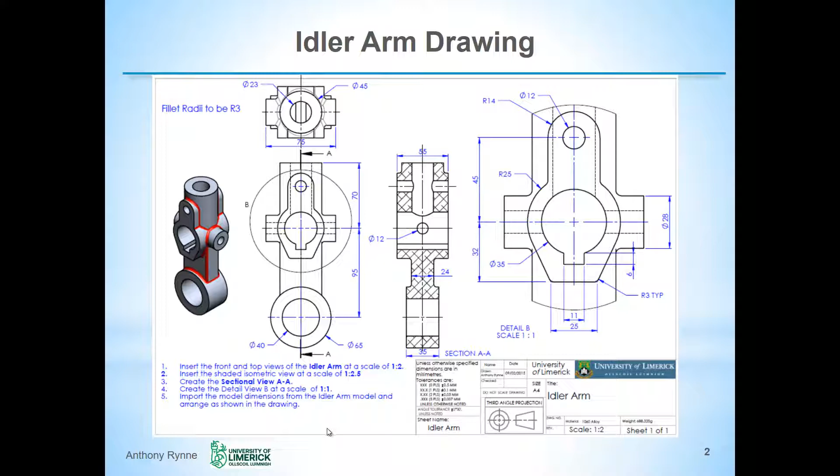Looking at the design intent for the model, the part is symmetrical about the central axis, as we've already seen, and therefore it makes sense to put the model origin on this axis so we can make maximum use of symmetry in our sketches and also in our end conditions when we extrude our features.

All the fillets and rounds in the model are radius 3 millimeters. We'll use aluminium alloy as the material, so 1060 aluminium alloy, and at the end the weight of our model should be around 488 grams.

A modeling tip that I would recommend is that when we are adding features, it makes sense to create the boss features before the cut features, as this avoids problems later on of cut features removing material that you have to add in.

A modeling tip that I would recommend is that you create the cut features after the boss features, or putting it the way I have there on the screen, create the boss features first. By doing things in this order, it avoids problems later on in your model when, if you have cut features already created and then start adding in boss features, you may run into problems with the boss features violating the features that you've created.

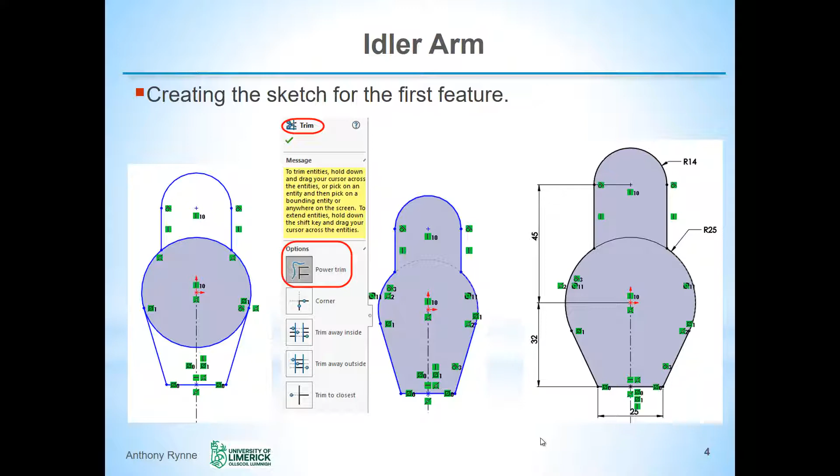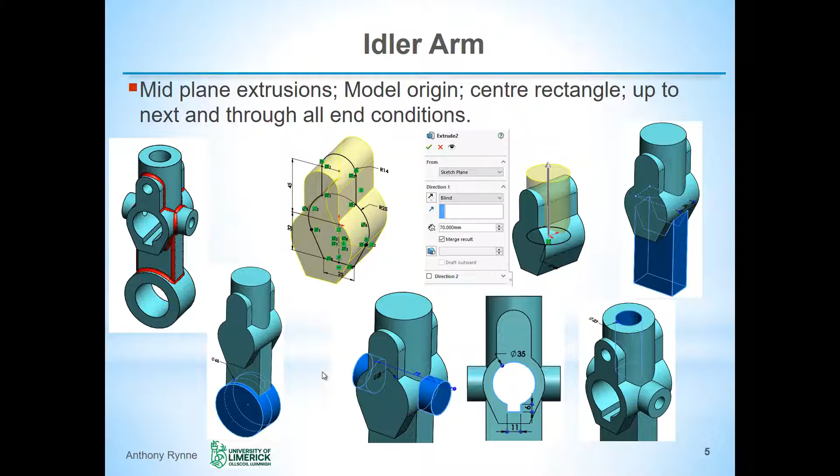Looking at the sequence of creating the different features, you can see here, to make use of our symmetry on the front plane, I've used a mid-plane extrusion here, and as we go on we'll use mid-plane extrusions in the other direction as well. So we'll create our boss features first, and then we'll go on and create our cut features, and usually at the end we would leave our cosmetic fillets, which can be added in at the end in a logical sequence.

So we'll go and model this part now in SolidWorks.

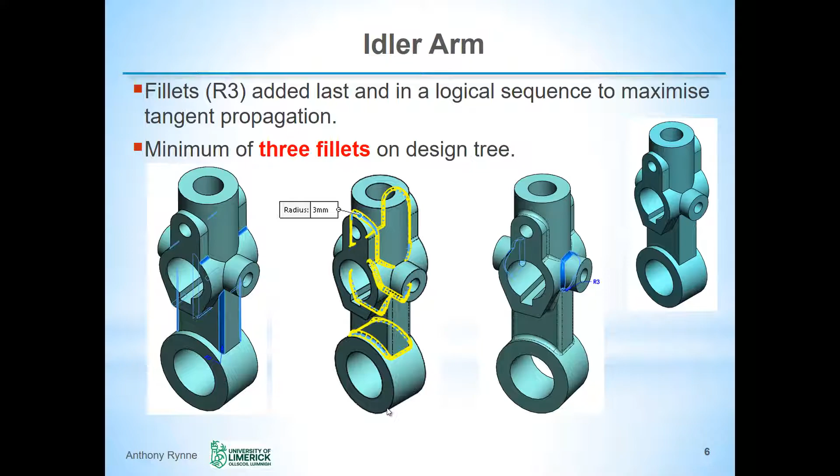I'll begin by opening a new part document. So I'll select one of my part templates. I have a plain carbon steel template here.

My material currently is plain carbon steel, but I am modeling this using aluminium. So I'm going to right click on plain carbon steel and select 1060 alloy. It's important to have the correct material in order to get the correct weight at the end.

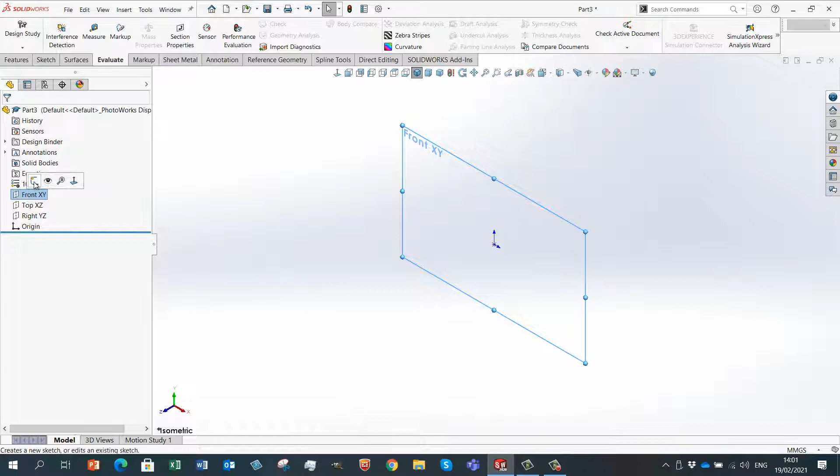I'll begin by opening a sketch on our front plane. So select the plane and click the sketch tool, and we can do everything from there.

Now I'm using mouse gestures, so by dragging my right mouse button, I'll start by drawing a circle from the origin. The finished circle will have a radius of 25, or a diameter of 50.

So I want to draw the top portion now, so I'm going to change to line. Right mouse button and drag my cursor to the left, we'll pick up the line tool, and clicking anywhere here in the circle...

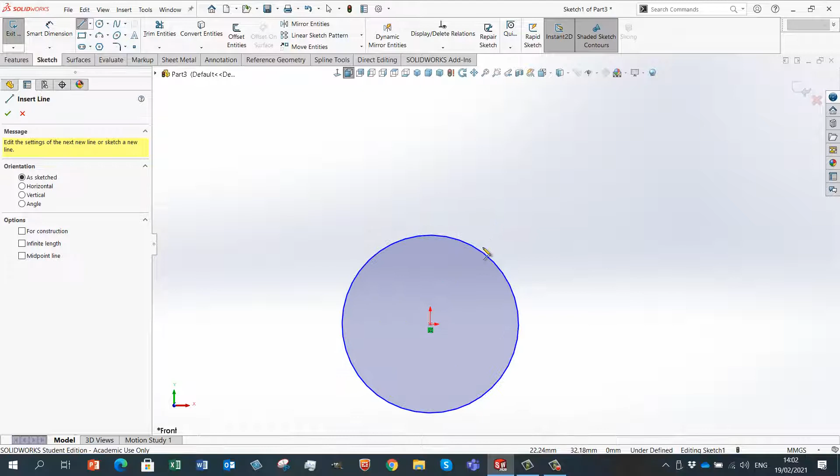I will draw a vertical line. Now if I drag away from the next endpoint and then go back over it again, SolidWorks will change to a tangent arc. So I'm going to draw my semicircle and bring the line down there to meet the circle.

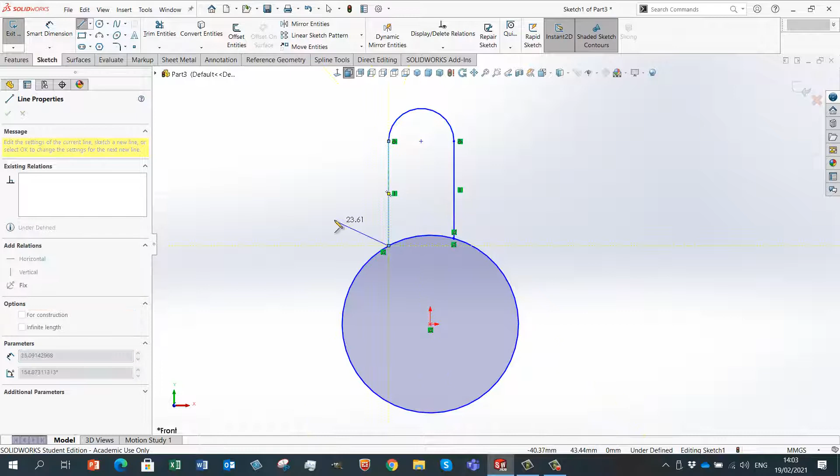If you press escape or double click the left mouse button, that will end your line command. Now you can see here that we've got a line there at the start that we shouldn't have, so I'm going to delete that out. That happened there at the start when we were drawing our line away, and we ended up drawing a little line. So if that happens, you just zoom in and delete it out.

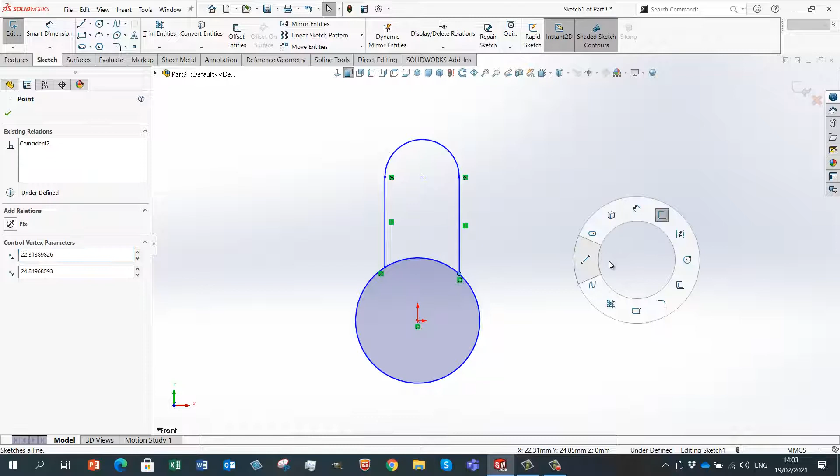So this is clearly not symmetrical. To make this symmetrical, I'm going to draw a construction line. Just draw a regular line from our origin, drag it straight up there, make sure it's vertical. And if I right click on it, I can convert it into a construction line.

So if I draw a crossing window, picking up the two vertical lines and the center line, I now have the option to add symmetry. So make symmetric - this is important. So now we have symmetry here in this sketch.

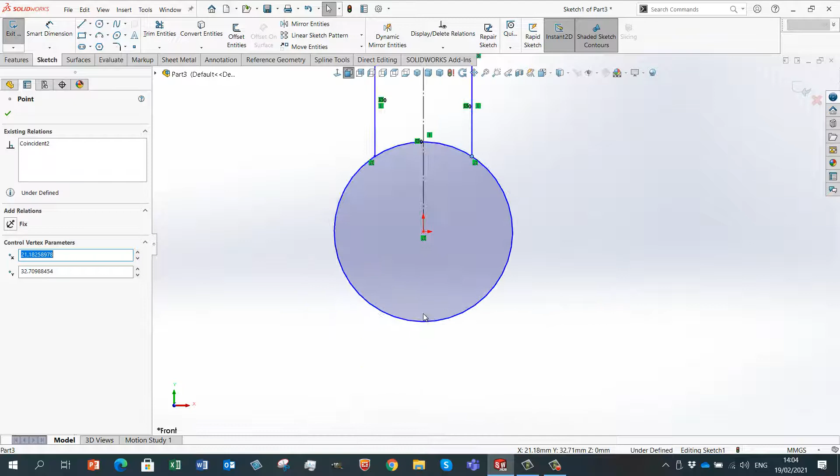Now I'm going to draw a line tangent to the circle. If you click anywhere on a circle and drag away from it like that, you can see the line is automatically tangent there.

So I'll draw a line down there, click, draw a horizontal line, again making sure it's horizontal, look at the feedback, and I want to draw a line back to the circle that's also tangent. Again looking at the feedback there, you can see the line is tangent. Double click your left mouse button or press escape to complete that line.

By clicking on the relations here, you can see I've got a tangent relation between the line on the left and the circle, and I've got the same over here. This also needs to be symmetrical.

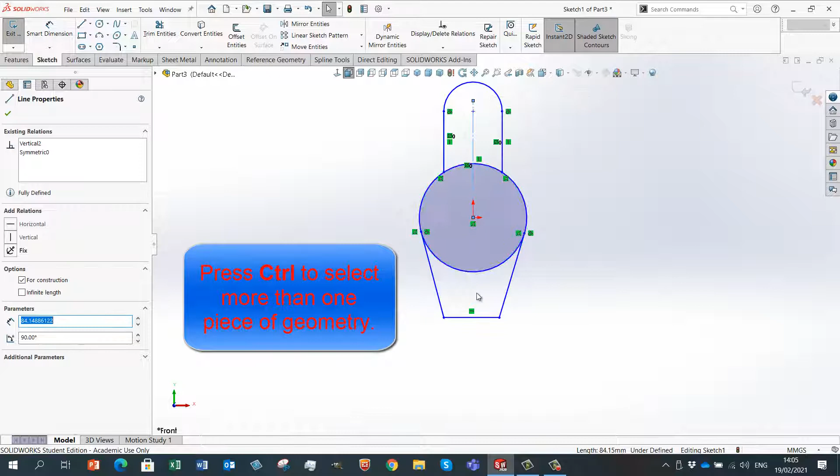I can use the same line up here, and if I use that now, I won't be able to use a crossing window, but if I click that line and press Control while clicking these two slope lines, I can also add symmetry there with respect to the same center line. Checking that, you can see now our sketch is more intelligent.

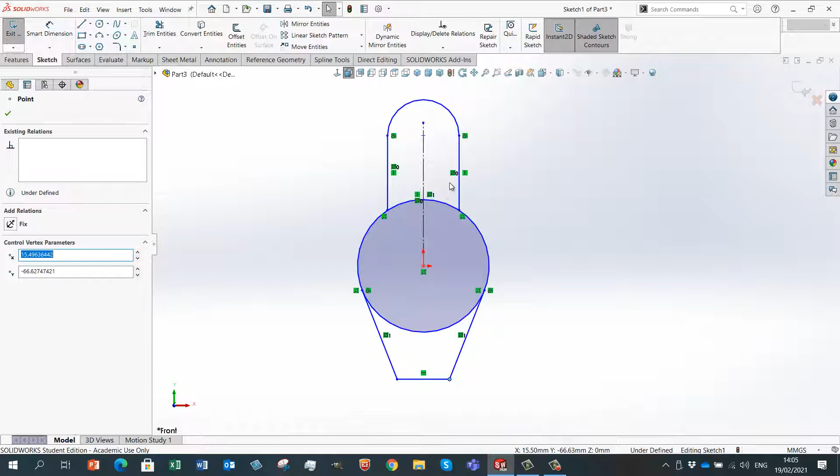Because I've got shaded sketch contours turned on, we can see here that the circle is shaded in, but this area here is not, and neither is the area at the bottom. So I want to create a closed profile here that's all shaded in.

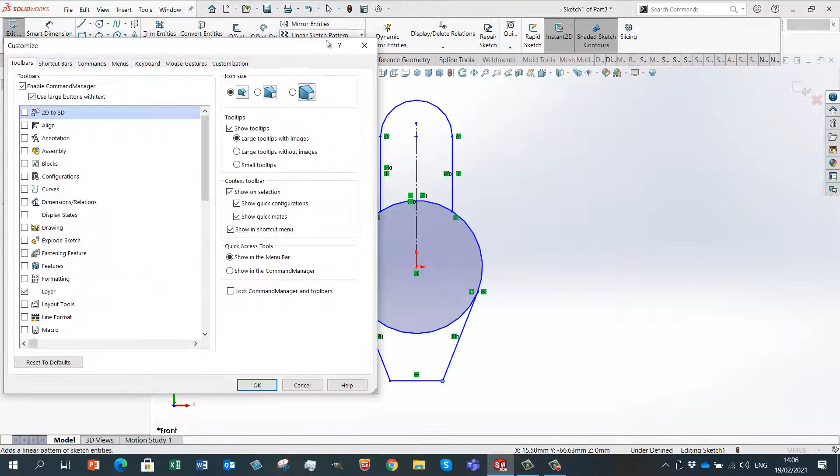So I'm going to trim away the parts of the circle that I don't want, using my right mouse button and dragging - you can see I've got 12 mouse gestures on my wheel. If you don't have 12 mouse gestures, you can turn those on by going to options, customize, mouse gestures, and making sure they're set to 12.

So dragging to the southwest, there's the trim tool. I'm just going to use power trim. I do have an option here to keep trimmed entities, but I'm not going to use that on this occasion.

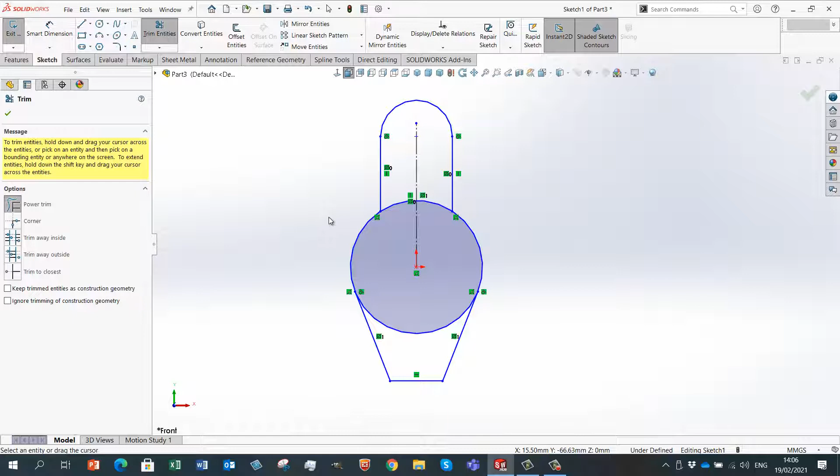We don't need any construction geometry for our trim circle. So just left clicking and dragging over the circle will get rid of that portion, and I'll do the same down here - all I'm doing is left dragging over the part of the circle that we want to remove. So there's my sketch now.

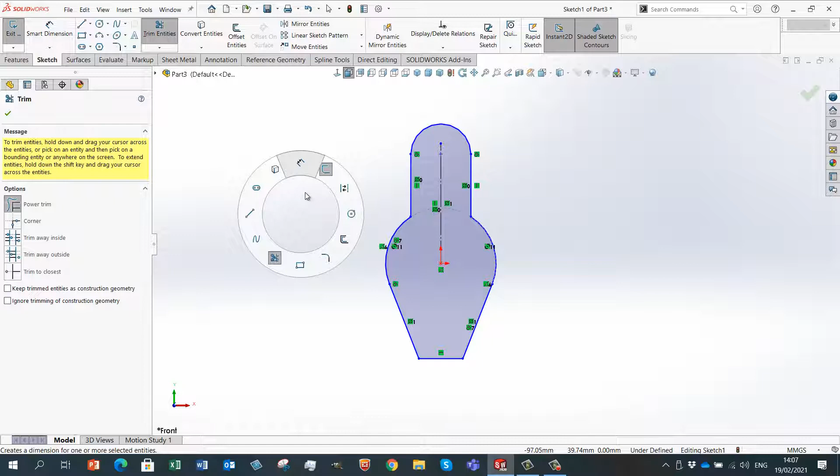I'm now ready to add the dimensions. So right mouse button, drag straight up to the top, and I can start adding my dimensions. Now when you add the first dimension, SolidWorks will scale everything proportionally.

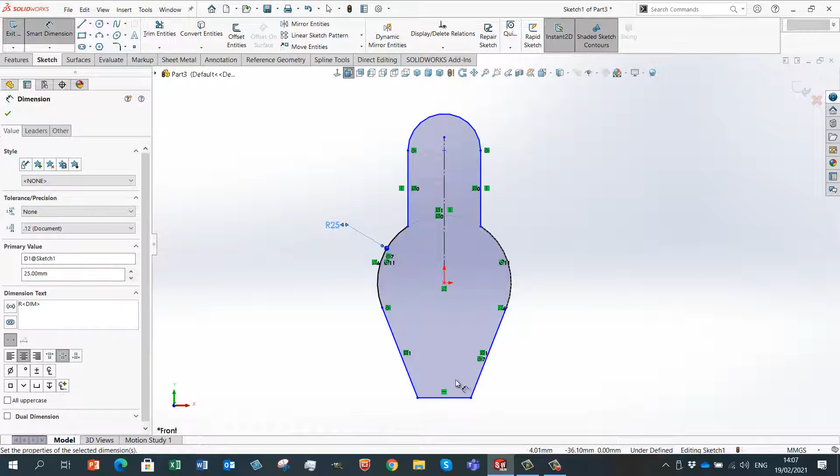So the radius on this is currently 38.9 and our final radius is 25. If I type in 25, everything has now been scaled proportionally and our sketch doesn't distort. This here is 25.

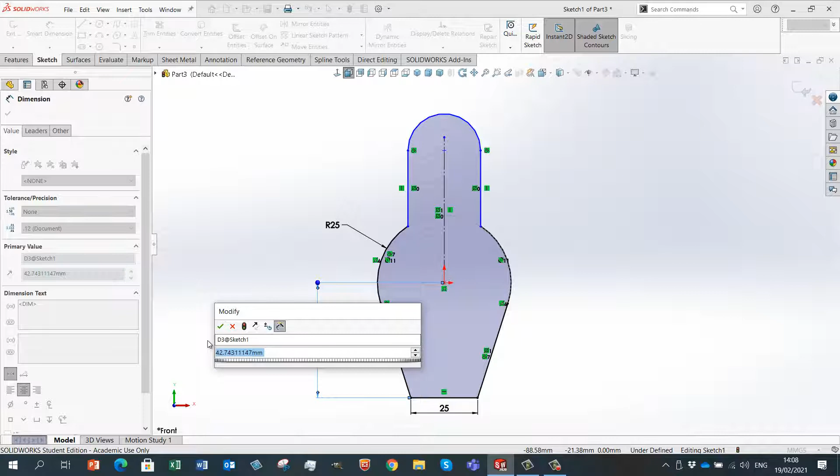The distance from the bottom edge to the center of the circle, or the origin, which is the same thing - but I'm going to select the circumference of the circle when adding my dimension, and that's 32. That gives you more options.

SolidWorks will find the center of the circle by clicking on its circumference, and similarly clicking on the circumference of this arc here, I will get the vertical distance between those centers, and that's 45.

So as I begin to add my dimensions, you can see the sketch is turning black, which means it's becoming fully defined. So clicking on this radius here, that's 14, and now my sketch is fully defined.

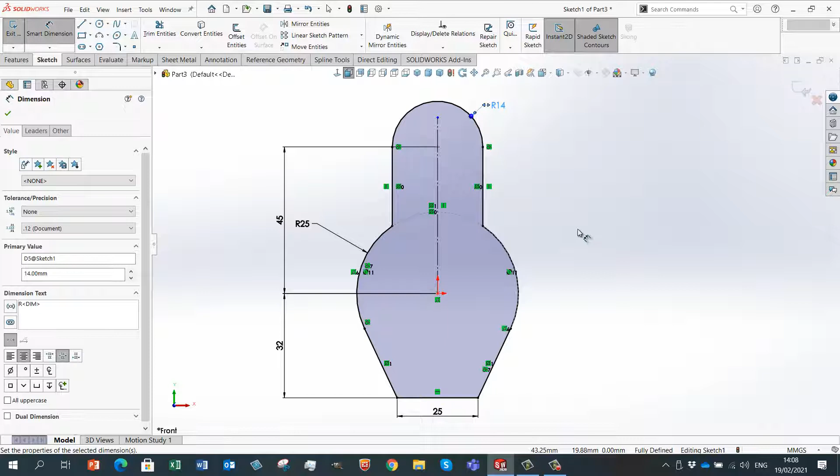So that's one way to create this profile here. That's our sketch completed. You do have the option of rounding these corners here if you wanted to with the sketch fillet, which you will find on the sketch toolbar, or if you drag your right mouse button you'll also find it on the southeast.

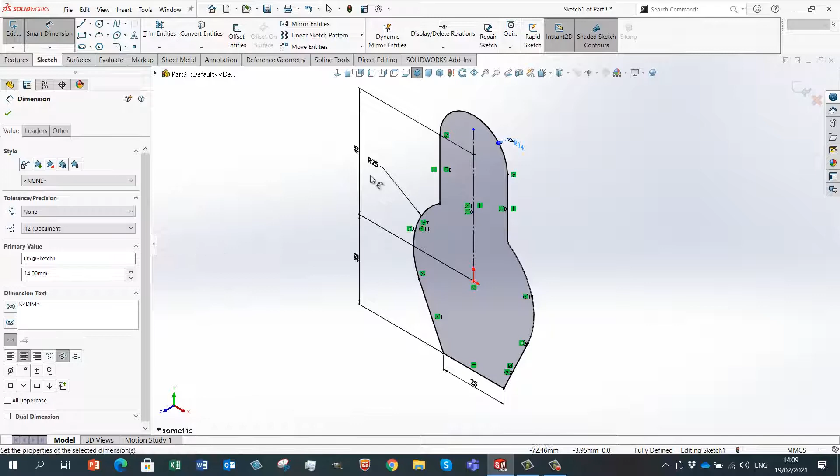So that's my sketch, I'm happy with that. What I'm going to do is put those fillets in later on as an applied feature, but you could put them in this sketch using the sketch fillet tool. Let's right click here and extrude our boss base.

So I'm going to make use of symmetry here when we create our feature by using the mid-plane condition. Mid-plane, as you can see now, places the sketch at the center of our extrusion, and we just put in the total distance from front to back. In this case the extrusion depth is 55.

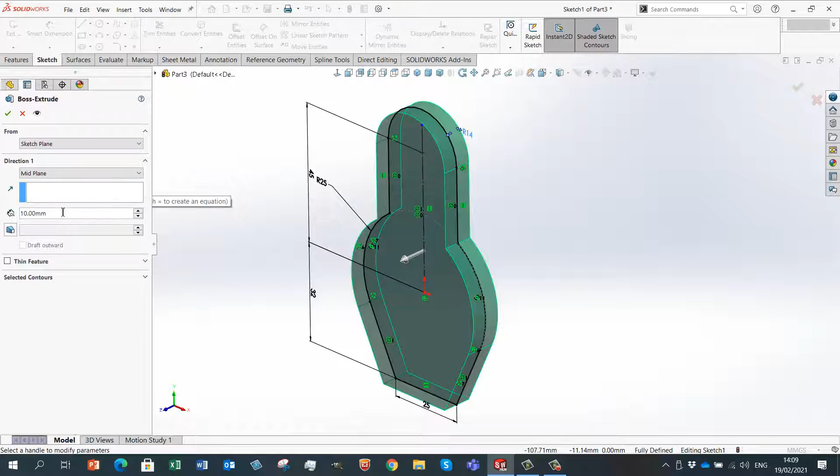So there is our first feature. The extrusion depth is 55, so SolidWorks will calculate that the sketch needs to be in the center and will work out an equal distance on both sides. Click OK, and there's our first feature created.

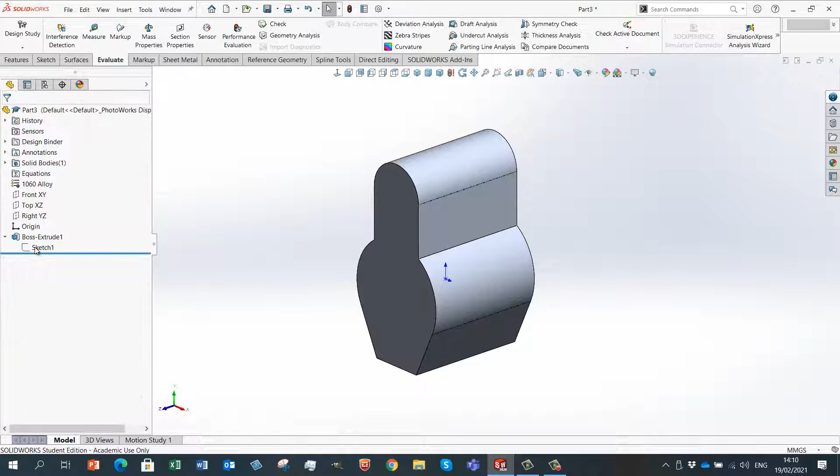You do have the option, if you wanted to, of right clicking on a sketch and giving it a color just to make it stand out in your model. And if I right click on the sketch and click the show tool, the sketch is then visible. I'll turn that off. We're going to concentrate on creating the boss features, because if I were to create some cuts at this stage, these would make it more difficult to add boss features through the model.

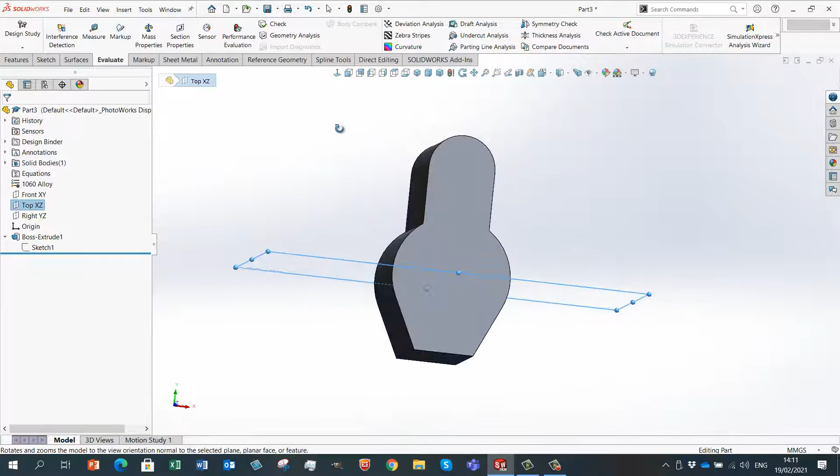The next feature I'll create is the one at the top, so I'm going to open a sketch on the top plane. The top plane coincides there with the origin of our sketch for our circle. So there's the model origin right at the heart of the model. Clicking on the top plane, let's open a new sketch.

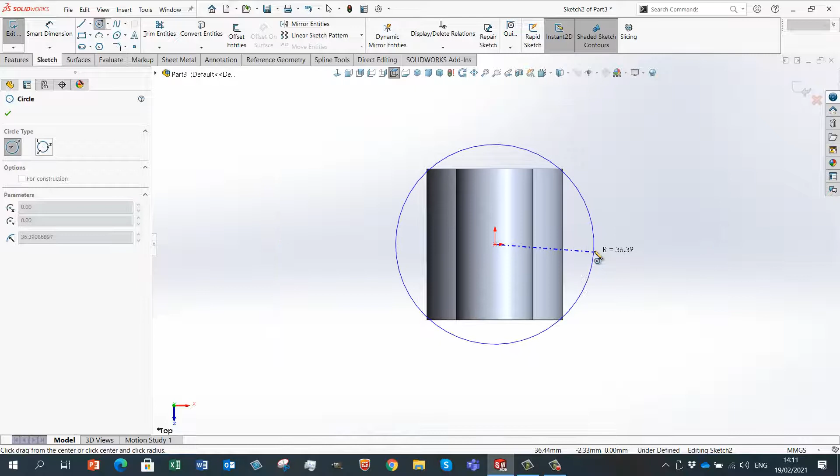So I'm now looking straight down on the model, and let's draw a circle. The origin is exactly where I need it to be. Drawing our circle there, and looking at the drawing, the diameter of that is 45. So let's dimension that.

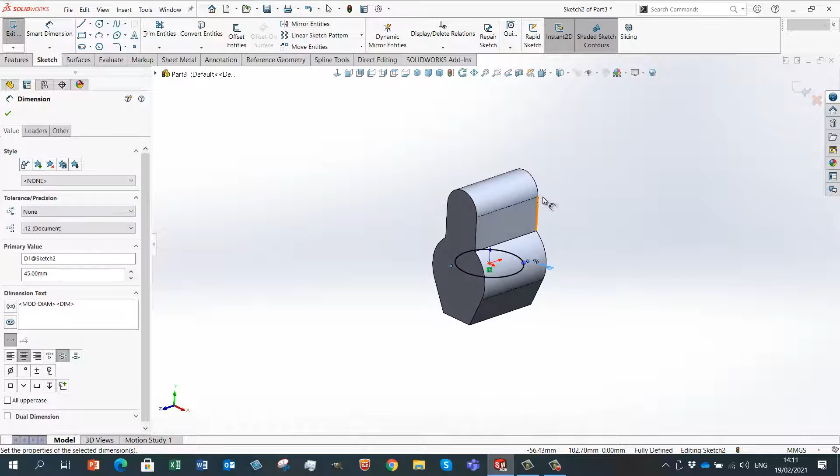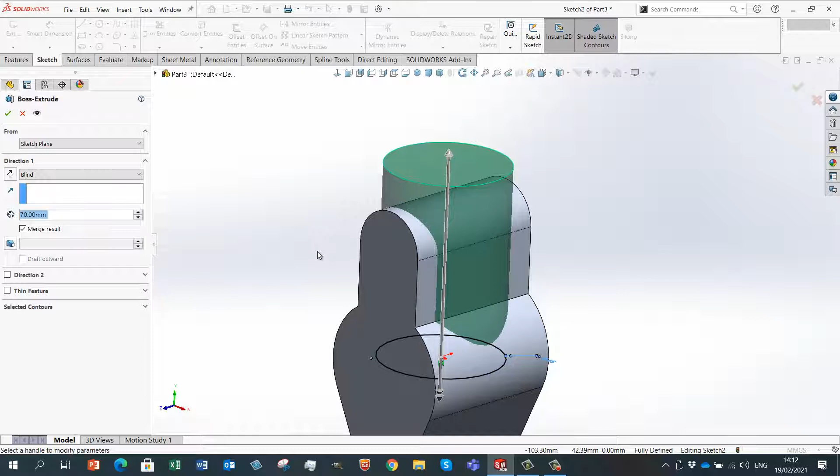Let's change to our isometric view, and you can see that circle is drawn there on the top plane, and we're just going to extrude this up as a boss feature for a distance of 70 millimeters. We can use this handle here and snap it to the ruler like so - 70 millimeters, that is the extrusion distance vertically from the top plane. Let's click OK on that.

There are lots of ways and sequences that you can take to modeling most parts. So I've created that one first, but equally I could have created the rectangle sketch on the bottom first. By doing it this way I can relate the size of my rectangle to the diameter of this circle because they are actually the same size.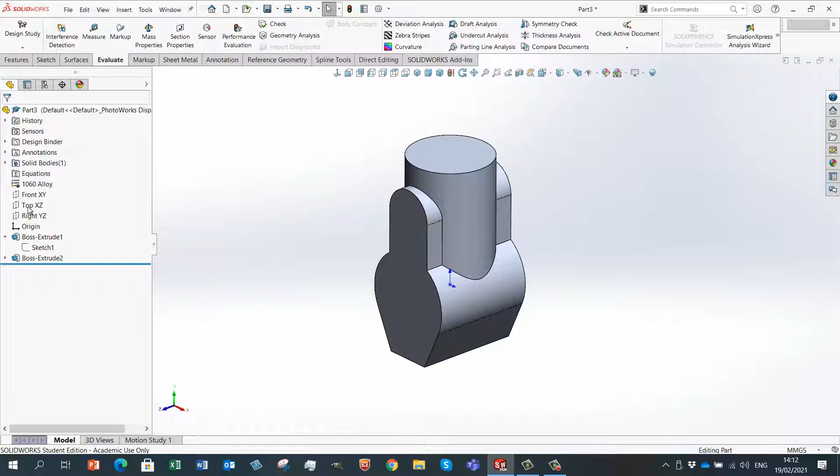So again, click on the top plane and let's open a sketch. This time I want to draw a rectangle, so dragging straight down, there's the rectangle tool, and when you draw a rectangle, I'm going to draw a center rectangle. I think that would be the best option here, and we can put in construction lines from corners if we want. So using that option, I'm going to click here again on the origin and drag out my rectangle.

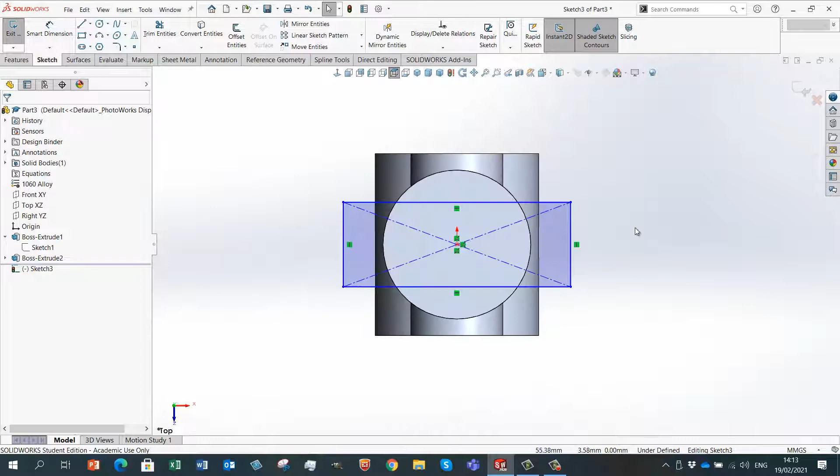So that rectangle is on the top plane, and looking normal to it, I'm now going to dimension this. Rather than making this side 45 millimeters, it's better for our design intent if I capture this relation with a tangent relation. So I'm going to control select the edge of our circle and our line, and add a tangent relation there with the pop-up that appears. You can see now that defines those lines in that direction.

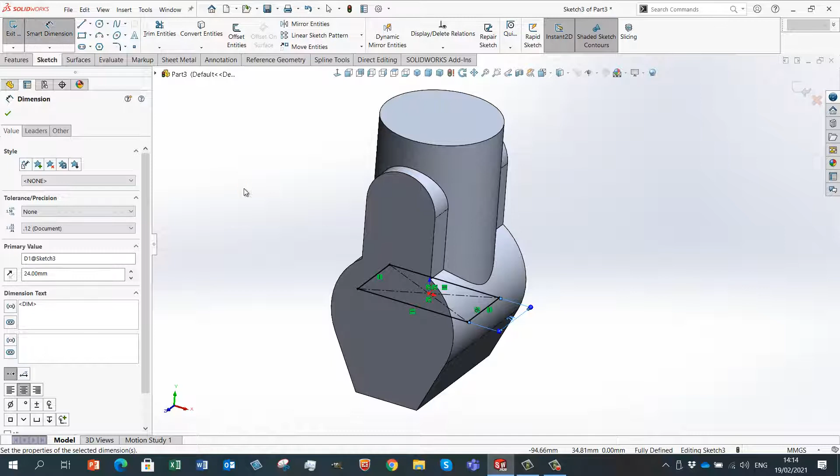The depth I will add with a dimension. So in this direction, the distance across there is 24. And I'm going to extrude this down 95 millimeters as per the drawing. So again, right clicking and extrude boss base. I'm going to reverse the direction and put in the depth of 95. So now that's our third feature.

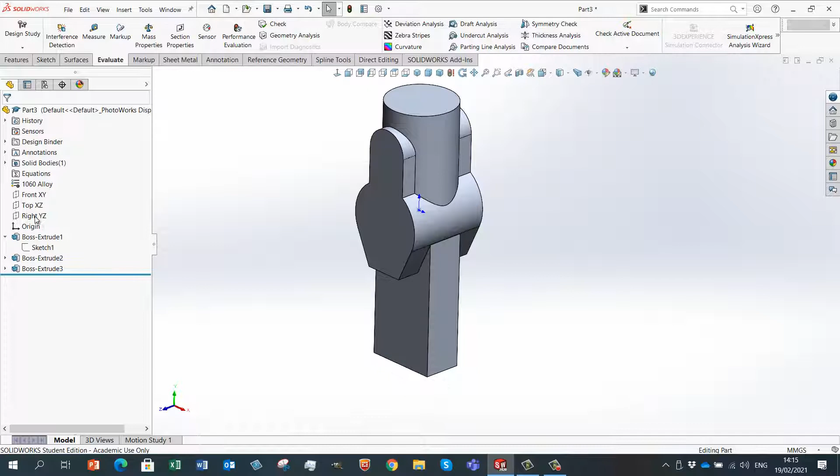The next boss feature I'll create is the cylindrical feature at the bottom. So I'm going to go back to my front plane and open a sketch, drawing a circle from the midpoint of the bottom edge, and the software again picks up the midpoint there for me. So just draw a circle. Let's dimension that. The diameter is 65. So there's our feature.

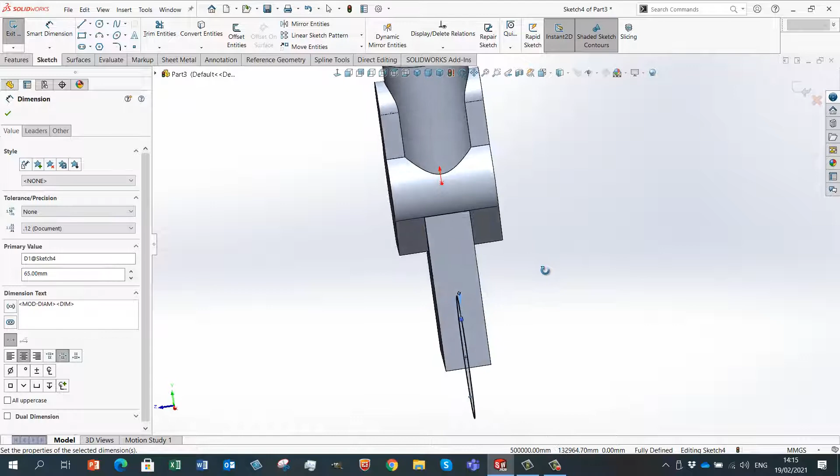Again, it's on the symmetry plane, which is the front plane in this direction, and extrude this out. Again, I'm going to use mid plane for my end condition. So changing to mid plane and giving the total distance, which is 35, that will create that feature.

So the first four features are all boss features. Now I'm ready to start removing material. I can do this in a lot of different ways. I'll start by creating a cut through here on the cylindrical feature at the bottom.

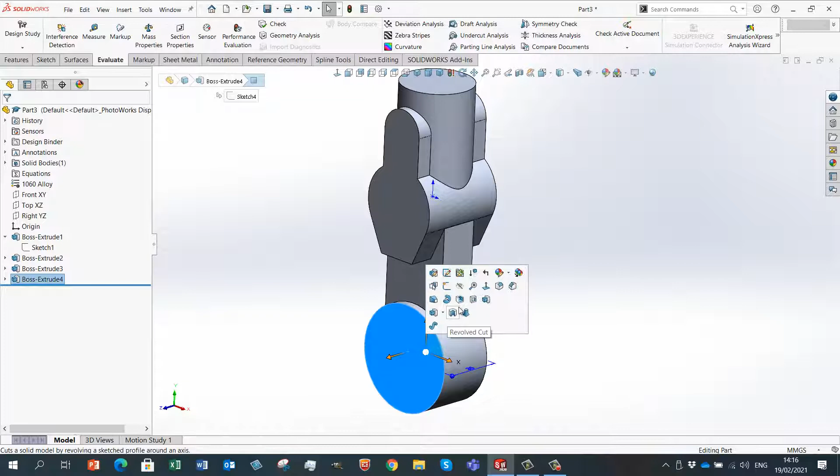So this time I'm going to open a sketch directly on that face, wake up the geometry here before I draw my circle. By clicking on it, I wake up the center, which makes it concentric. Now let's dimension this - that is a diameter of 40 millimeters.

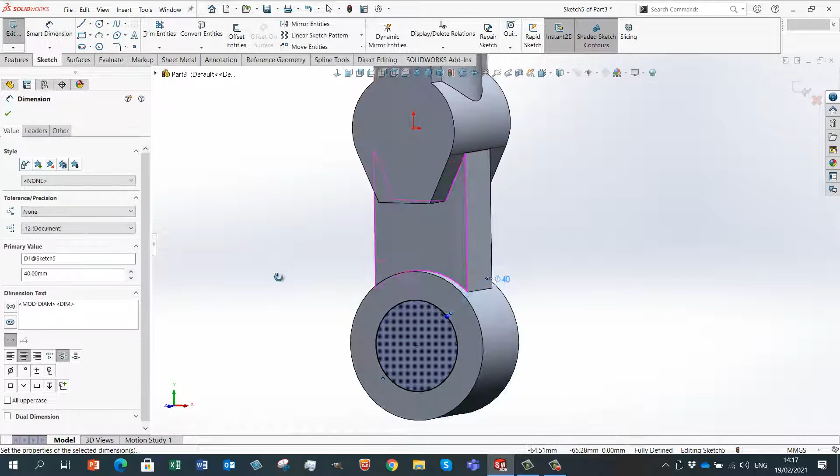Right click and again using my shortcut menu, extrude cut, and through all is the correct end condition here. So change that to through all, through all in that direction, of course, and click OK.

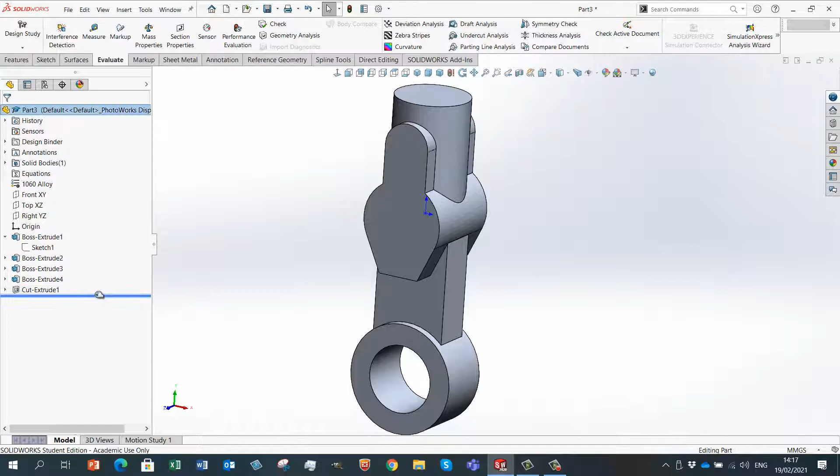The next feature I'm going to create is the cut. Actually, I missed a boss feature - there's another boss feature running in this direction that I forgot to add. It doesn't matter that the cut was created beforehand since it won't interfere with this boss feature, but I'll use roll back to demonstrate. So I've rolled back my design tree before the cut feature, and I'm going to put in the other boss feature first.

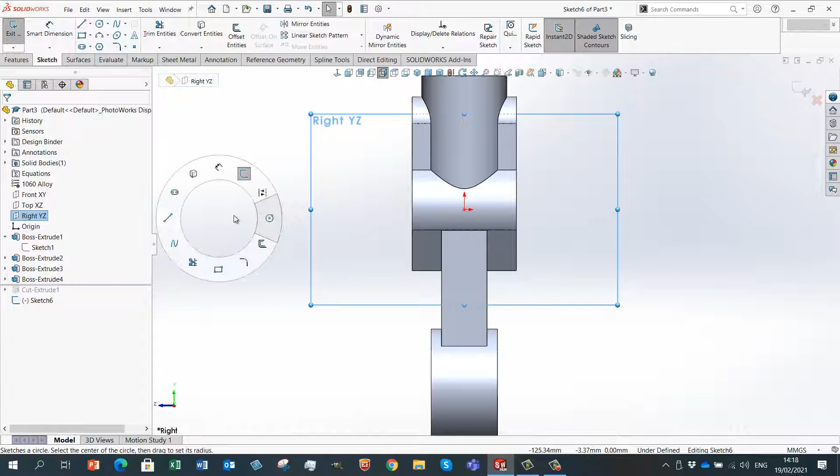So this time on the right plane, let's open a sketch, and again you see the advantage of creating the first sketch with the origin in the correct place - it makes it so much easier to add subsequent features. So the origin for my sketch is in the correct location. Let's draw my circle and dimension it.

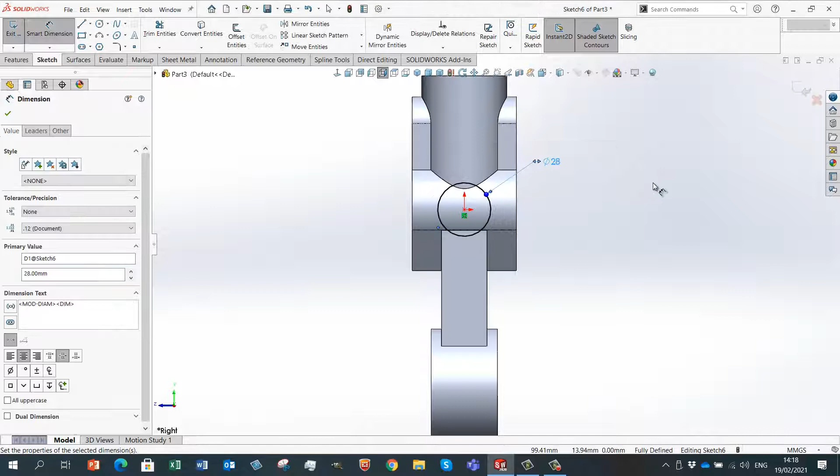If you inadvertently exit out of a sketch, the sketch is now gray. If you double click on it, you can get back into your sketch again, and it's now active. Let's dimension the diameter of this boss feature - this is 28 millimeters, and that's where it is on the right plane.

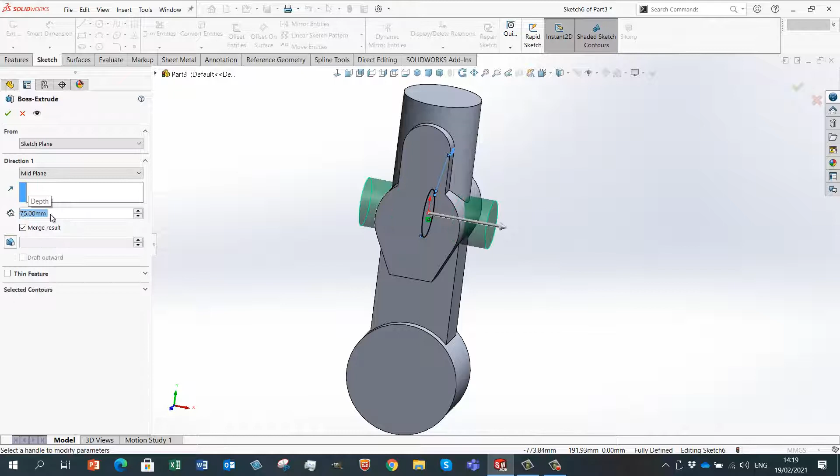So we're going to create this as an extrusion, and again we're going to use mid plane to make use of symmetry. The total distance across is 75, so we put in the total depth, and SolidWorks will calculate the extrusion to be equidistant on each side of our sketch. Let's click OK on that - now we have all our boss features created.

I'll roll forward, and there's the cut that we created earlier. I'll now create the cut here for the keyway on this face. Click the face, open a sketch directly on that face, and let's draw our circle. There's a circle with a keyway on the bottom, so let's put in a center line - make sure it's vertical, right click, make it a construction line.

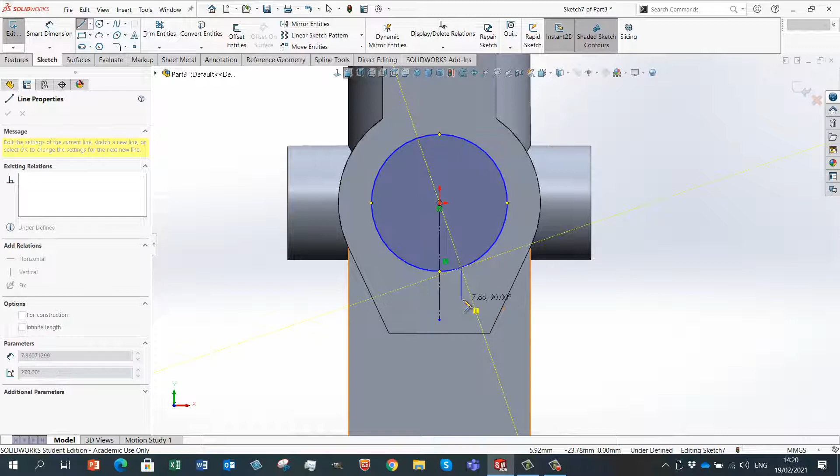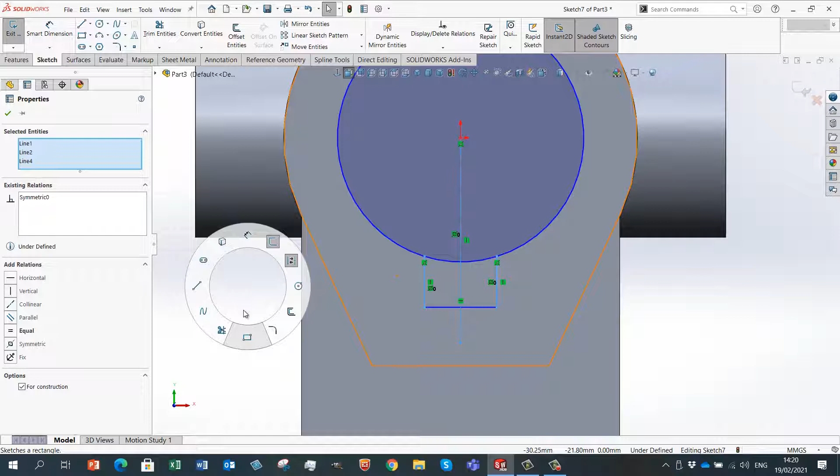So I'll make this symmetric - it's not symmetric currently, as you can see. Using my crossing window, picking up the center line as well as the two vertical lines, make that symmetric. Now I'll trim away this bit of the circle here as we had before, and let's put a dimension on this circle by clicking it and dragging it out.

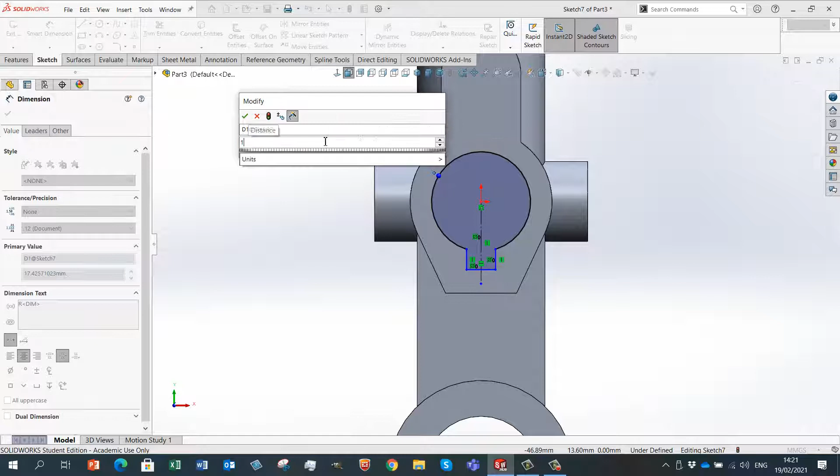The diameter is 35, which will make the radius 17.5. Now if you want to change this dimension to a diameter dimension, it's always better to use the dimensions on the drawing. Having added it, I can right click on it and go to display as diameter, so it displays as the diameter now.

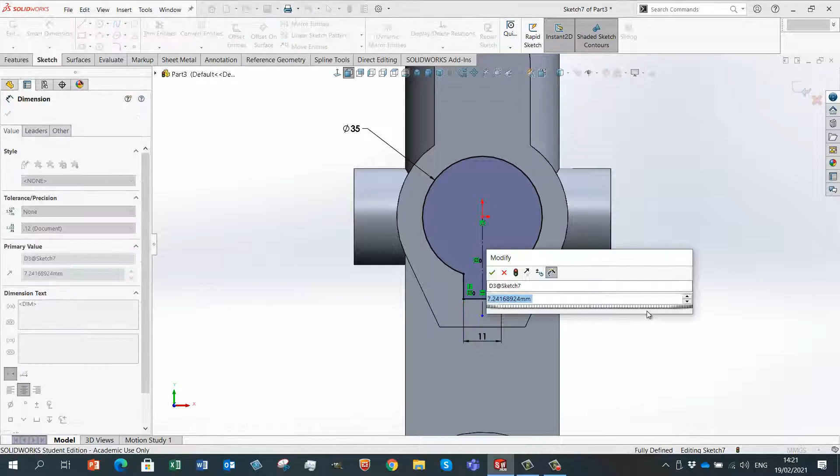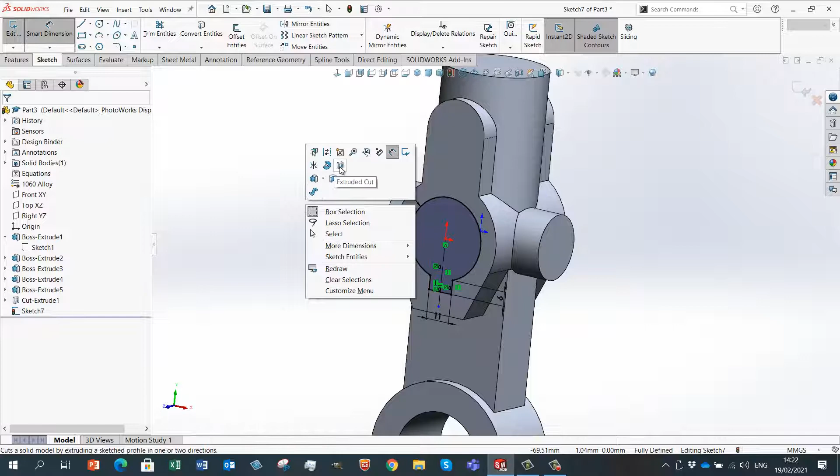So the size of my keyway here is 11, and the distance on this side is 6 millimeters. So that is our cut now fully defined. This sketch had to be created after this boss feature, otherwise I couldn't use my mid-plane extrusion like I've done previously. So right click - this is a cut feature, end condition through all, click OK.

By doing it in this order, I'm not going to have any issues trying to remove boss features from within that cut later. So think about the sequence in which you create your features.

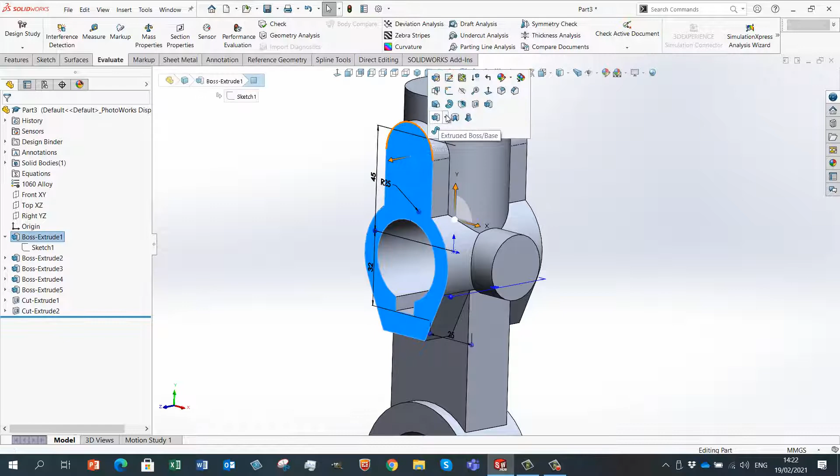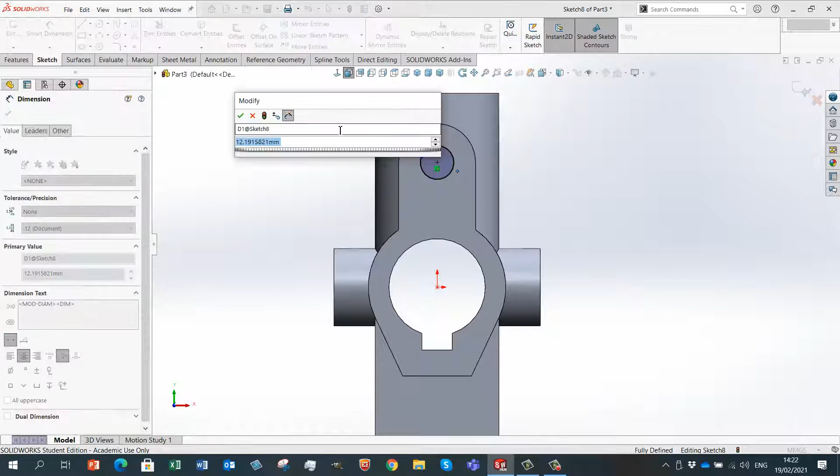So again, selecting the face directly of the model, let's open up a sketch and draw my circle. I have auto rotate turned on so that each time I create a sketch, I'm automatically looking normal to the sketch plane, and that is a big time saver. The diameter of this circle is 12, and again it's a through all cut, so create it as through all and click OK.

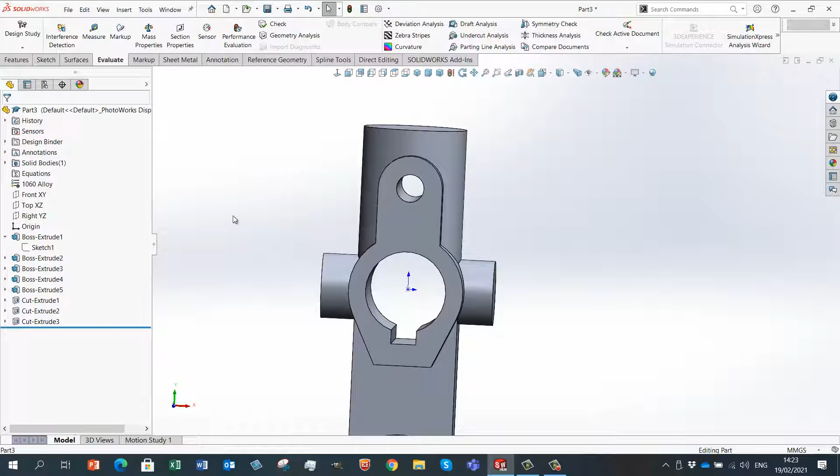Now I've just realized that I've created this cut here, but I also have a cut going through here. So when you think about this, I think it's clear that I should have created this cut before this one, because we wanted to run up to this surface here.

So what I'm going to do is show you that we can, as we did before, roll back and say this feature needs to go in first. Clicking on this face, we can change our mind - SolidWorks is very forgiving. You can edit any feature at any time, go back and edit the sketches, and change the design tree order consistent with parent-child relations.

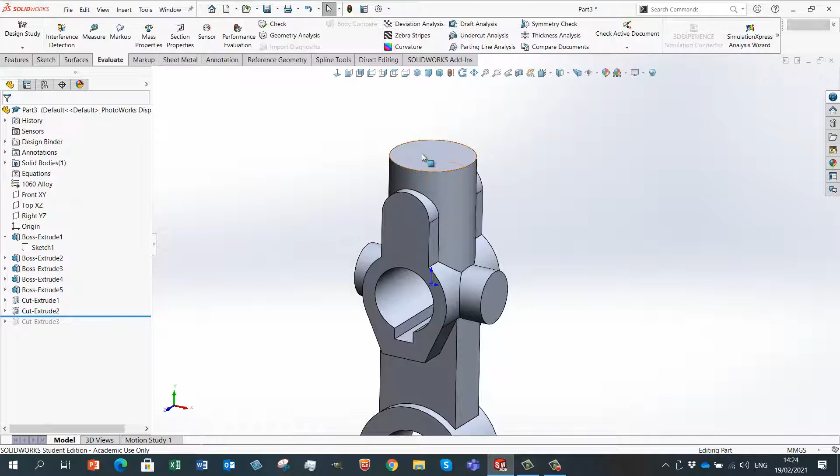So if I hover over any feature here, you can see the parent features are there, and if I go to the cut feature, you can see that cut feature is dependent on the boss feature we created at the start. Okay, so selecting this face here, let's open a sketch and draw our circle.

So this circle has a diameter of 23. So there it is, fully defined.

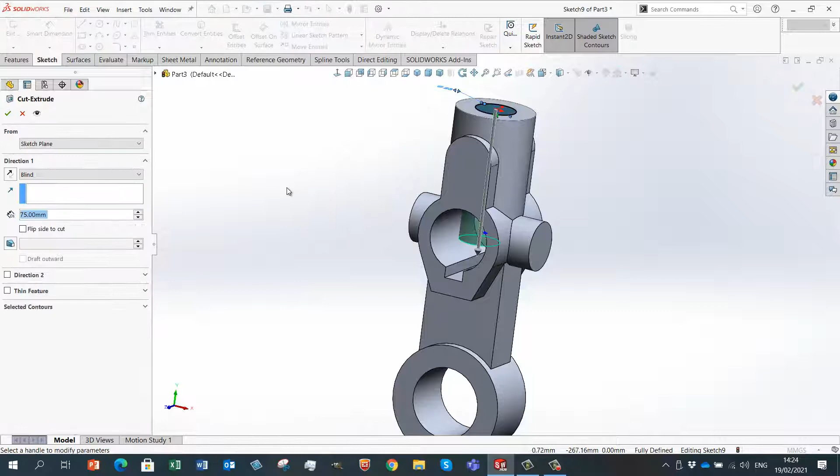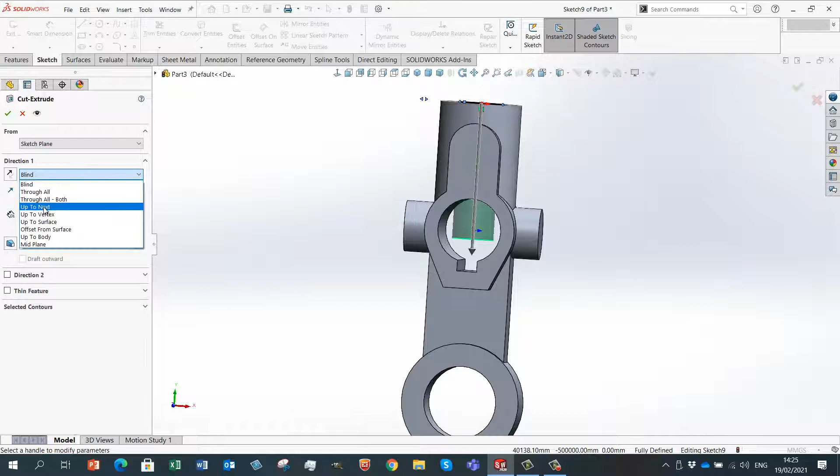Now we want this to run up to meet this surface here. So if I right click, select extruded cut, I want it to stop at this surface. Rather than extruding this blind, which it is at the moment, if I were to change this feature and it was greater than it is now, then this mightn't go through. So the correct condition here is up to next. Selecting up to next, SolidWorks will find the next surface, which in this case is the cylindrical surface here. Click OK on that.

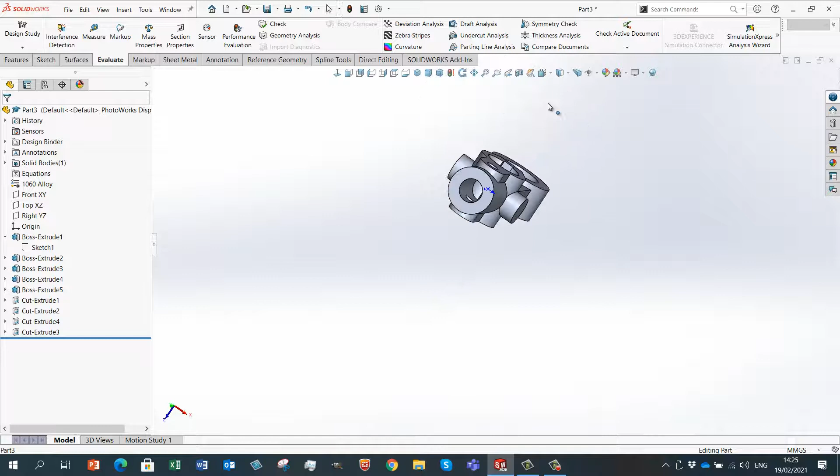Now let's roll forward, and we use through all on that one, so that's not affected by the feature we've just added. Got another hole running through on this face here.

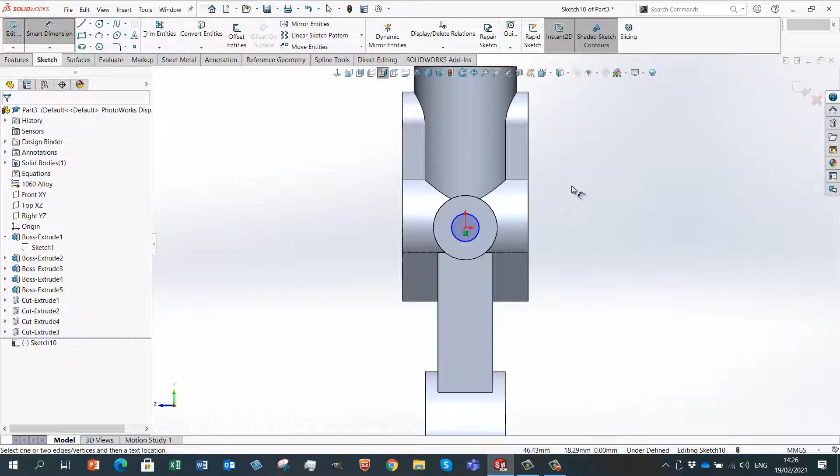So again, let's open our sketch, draw our circle, and the diameter of this hole is 12 millimeters. So again, this is a through all cut. Right click, extrude through all, and there it is.

Now I haven't saved my model yet, so you can see here the first 5 features are all boss features, and then we've had 5 cuts. Now it doesn't always follow that's the way you're going to model, but generally speaking, as a rule, create your boss features before your cut features, makes your design intent more robust.

So let's save this. I'm saving it as an idler arm, and it's a SolidWorks part file, so click on save.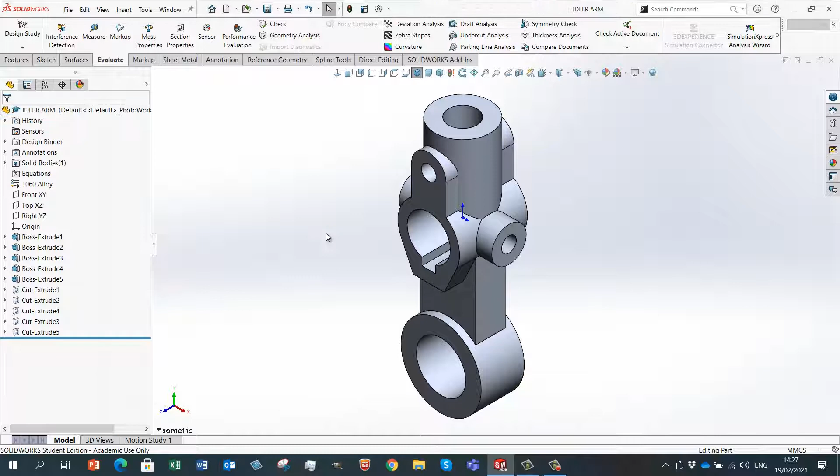So that's now saved, and we now have to add in our fillets. So there are a number of fillets, and we need to think about the order in which we're going to add fillets. They're all R3s, but I'm not going to add them all together because it probably won't work.

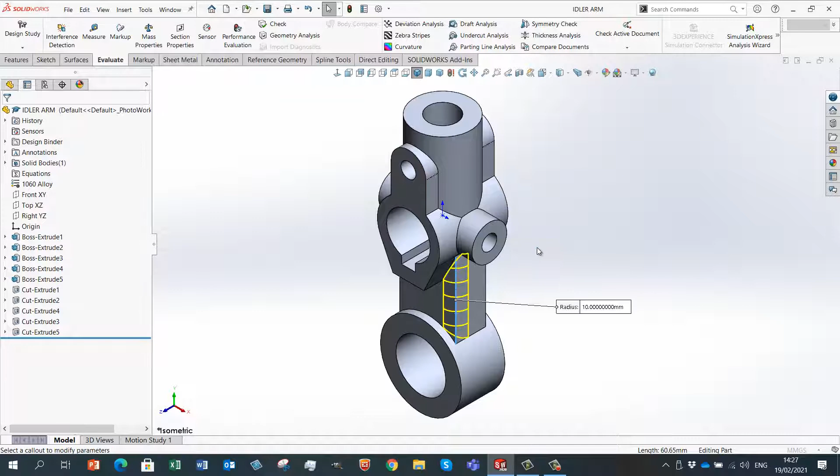So let's select this edge here, and I'll click on the fillet tool. The radius, I'll use the callout here, is 3 millimeters, and I'm going to pick the 4 vertical edges. Now I can select through the model like so.

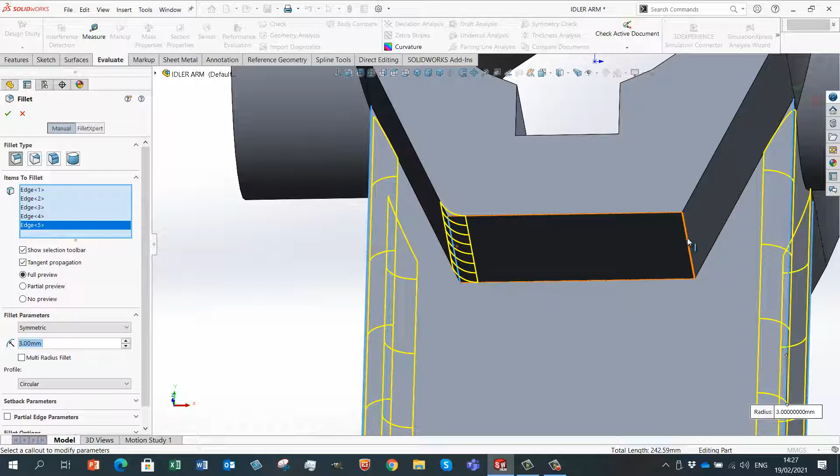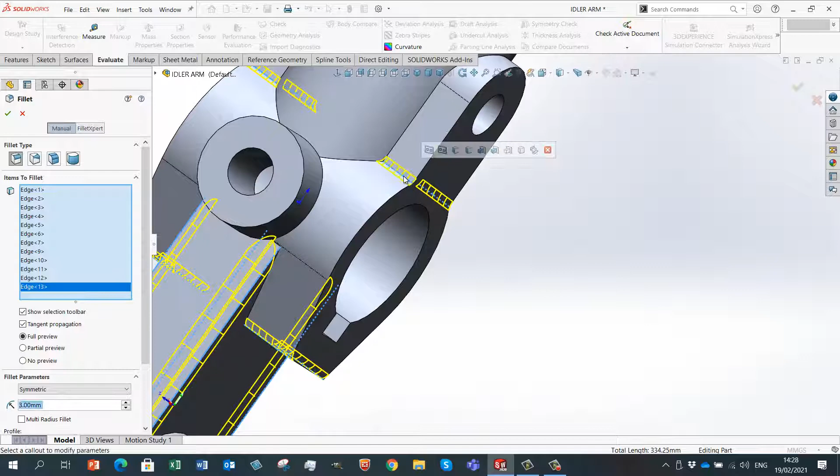I'm also going to fillet this edge here and the corresponding one at this side, and the same at the other side. Now I've selected the wrong edge there, so if you select the wrong one, just delete it out. I'm also going to select - it probably would have been easier if I added the fillet radius to those edges in the sketch of the first feature, but I can add them now.

So having added those fillets there, you might like to see them a bit easier, so I can give them a color. Just to make them stand out, I'll make those fillets red.

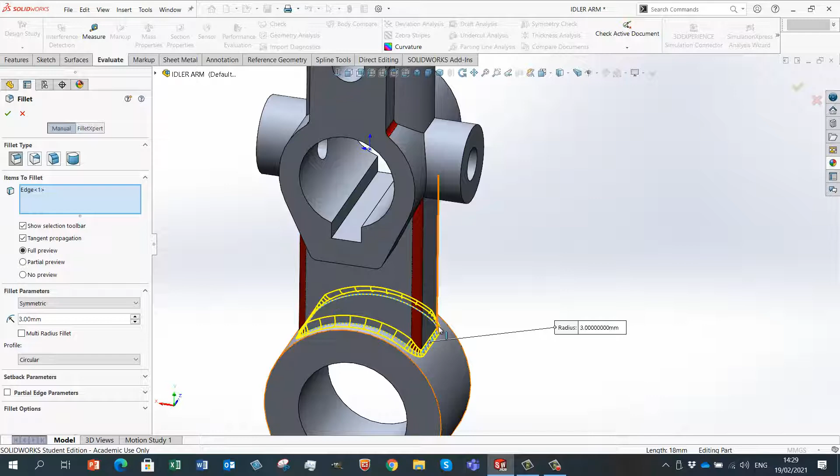So when we're adding fillets, we add them in a sequence that makes it easier for subsequent fillets to be added. So now if I select this edge here and go to fillet this, again the radius is 3, you can see the way the fillet runs around all of these tangent edges, and that's because of tangent propagation.

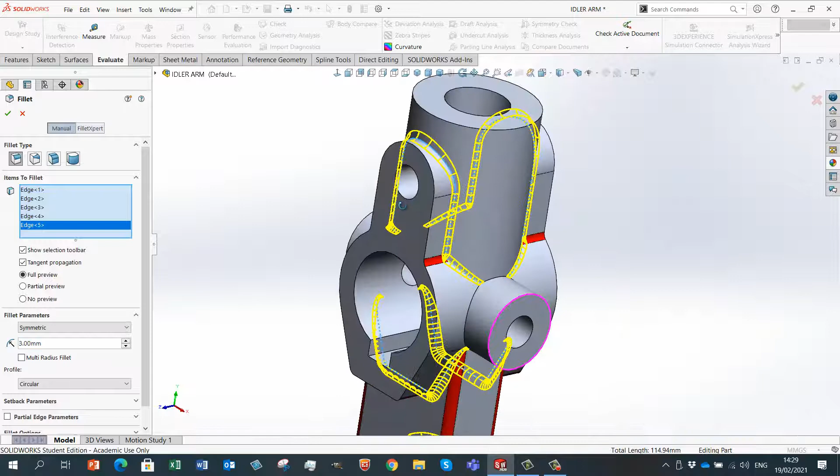So think about the sequence. Similarly here, just selecting one edge, the fillet will run around those edges because of tangent propagation, and similarly here, and the corresponding one at this side. So I will add those 5 fillets there, like that.

If you click Ctrl S at any stage, you can update your model. Again, if you want to change the color of those fillets, change the appearance, you can do so.

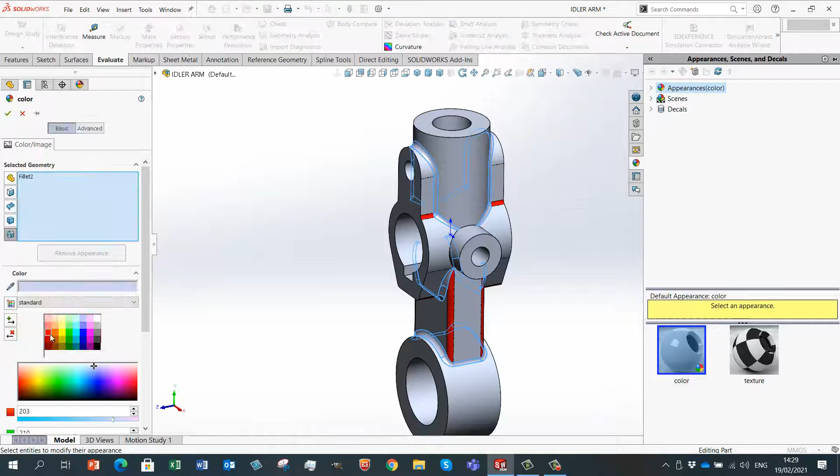Finally, if I select this edge here and add my fillet, I've got a 3mm fillet at this side, and you have the corresponding one at that side. Let's click OK. Let's change the color on those.

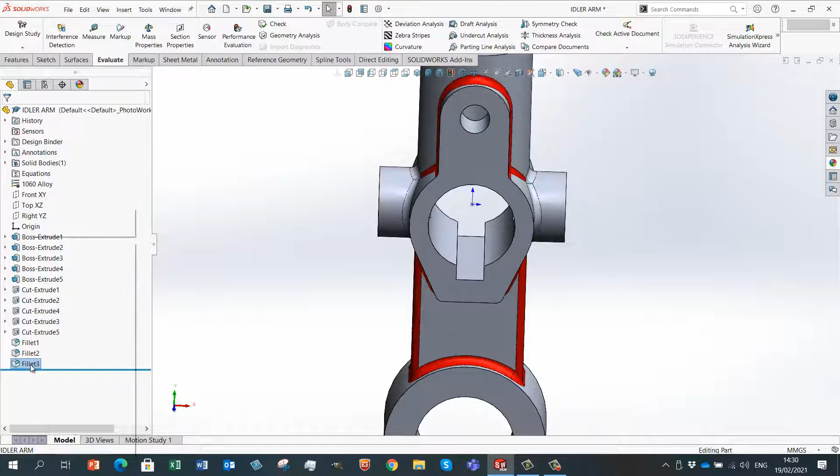So again, change the appearance, it just makes it easier to see those on your model. So let's go to our isometric view.

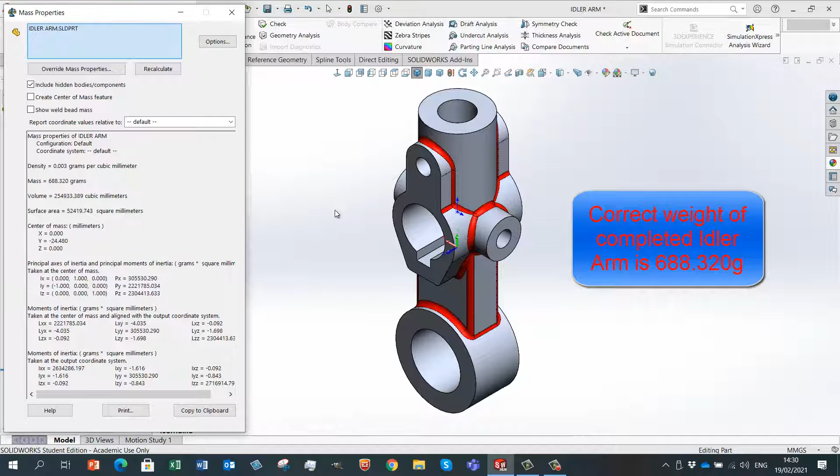Let's check the weight of our part by going to the Evaluate tab and selecting Mass Properties. 688.320 - that's exactly the weight that we gave you at the start of this video. So that's the correct weight of the part.

What you learn from this exercise is the importance of using symmetry and of creating the first sketch with the origin in the correct location, because the origin of the first sketch determines where the model origin is.

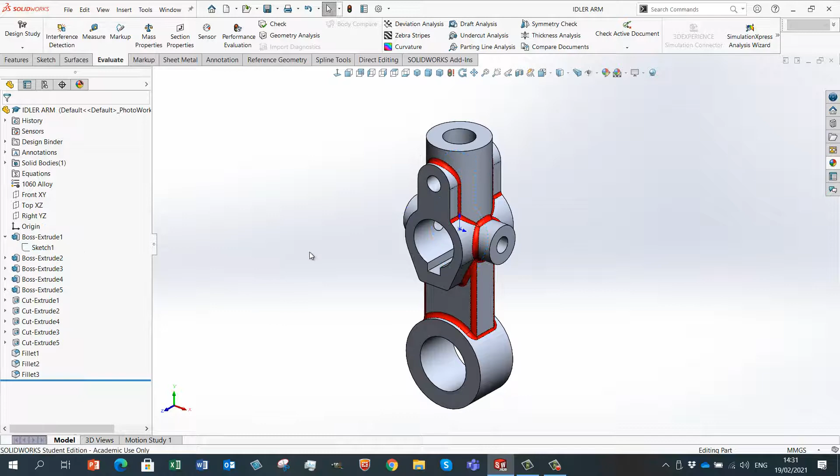So using our symmetry there, we don't need any additional planes. The front, top and right planes run right through the model. I can auto size these by right clicking on them, and they get sized relative to the geometry like you see here. So there is the right plane running right through the heart of the model, and the front plane similarly running right through the model.

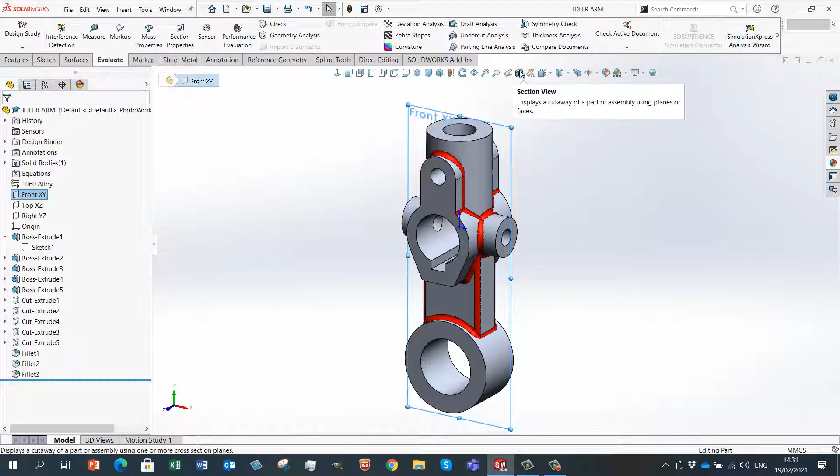If you want to, you can have a section view and see what it looks like looking straight in from that direction. This is just taking a slice through the center of our model, and we haven't actually cut the model.

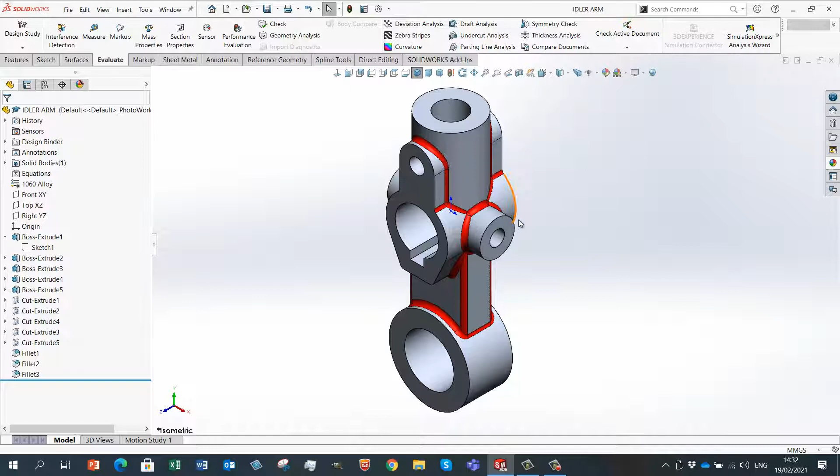So check the weight for the part, and if you don't get the correct weight, then just go back and check your modeling geometry and make sure that everything is fully defined.